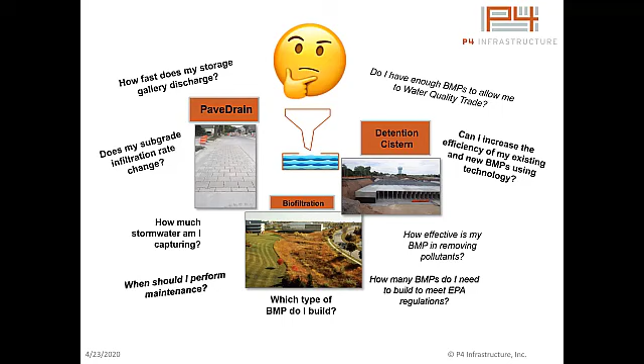So what is the PaveDrain P4 system? Well, as you know, and you're here today and have seen it before, the PaveDrain system is this articulating concrete block surface. And what we've done at P4 is created a block that includes a computer, solar panel, battery pack for running computers, and also a cellular transmission system for a water level sensor that is beneath and in the storage gallery below the surface.

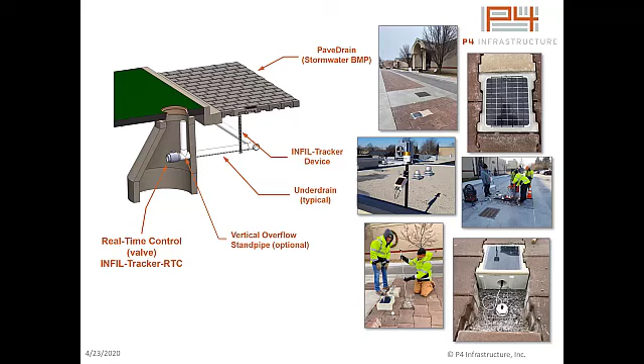Now, what happens below the pavement? Well, we started out, and Doug walked you through a series of experiments. We started out with what we call our PaveDrain Patio in Brown Deer, Wisconsin. And this is a 2-foot deep storage gallery. It's carved into very, very stiff clay. So it's a 10 by 10 patio, and we have 2 of our sensors installed. And there's been many rain events that have occurred on this surface from October 2019 to present.

The surface runoff that goes to this is a little bit from the adjacent parking lot, some of the direct rainfall that falls on the patio surface, and then also some downspout discharge from an adjacent building. We have the rainfall gauge, or Rain MX as we call it, on the building next to the patio. And what you see in the graph is a couple of rain events, and there's many more as I mentioned. These rain events do indeed cause infiltration through the surface into the storage gallery below.

And as I mentioned, this was very, very stiff clay, and the infiltration rate is really quite slow. And you would expect this to be on the lower end of WinSLAMM models for infiltration rates, on the order of 0.01 to 0.015 inches per hour. But what you can see here is that rain events do indeed cause stormwater flow through the surface into the gallery, and the gallery is indeed discharging, albeit at slow rates, and that's expected given the material that it's founded upon.

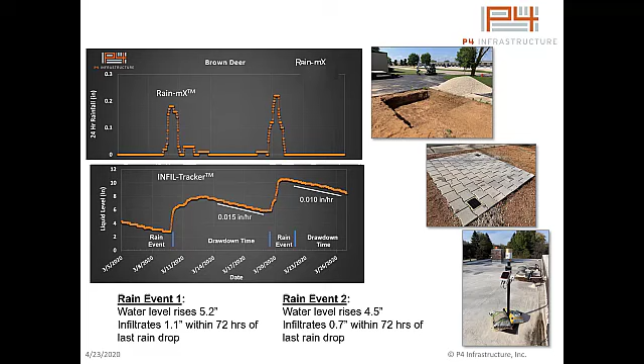Here's another one. We do have an implementation of 3 of our sensor systems in Cudahy, Wisconsin that have been active since January of 2020. And the rainfall gauge that you see there is on top of, pardon me for going backwards for a second.

So I'm sorry about that. Had to admit someone to the meeting.

We now have the Van Norman Alley in Cudahy. And the rainfall gauge, as I mentioned, is on top of City Hall. And there are 3 sensor systems located throughout the city, one of them in an alley application. And what you see here is a series of rain events between January 20th, 2020 and March 20th of 2020.

And what you see is the infiltration of the water is happening through the surface, as well as being drawn down by underdrain. So this is a typical application of underdrain below or within the storage gallery. That initial very steep slope is water that is going through the gallery into the underdrain. And then there's a slightly more shallow slope where the stormwater runoff is actually infiltrating into the ground.

And what's interesting about this application is it's another one of those that tends to have irregular maintenance associated with it. And in the lower right corner is what the joints look like. And so Doug has shown some instances where this is a plugged surface by many implementations and applications and visual evidence. However, what you can see is there is water going through the surface, going through the gallery, and discharging from the gallery on a regular basis with each rainfall event.

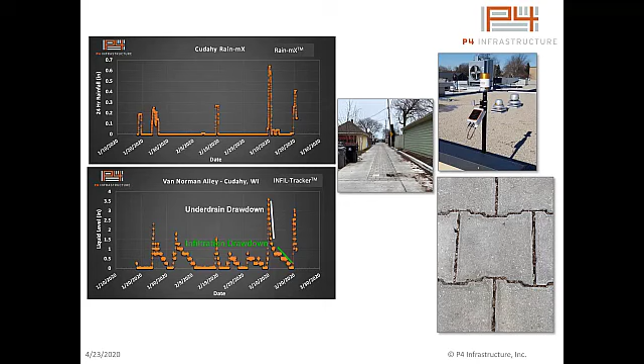Now, how does P4 look at this system, which is a permeable pavement system? Well, we look at the permeable surface as basically a funnel capturing water. We look at the storage gallery below as a tank that stores water. Now, according to many guidance principles and standard guidance documents, the underdrain presence within these results in a pollutant efficiency of 65% for suspended solids and 35% for phosphorus or total phosphorus.

So when that underdrain removes the water from the gallery, it is not as efficient as it could be. If you're infiltrating into the ground with all the water in the gallery, you can have 100% pollutant removal, both suspended solids and phosphorus. So what the P4 systems do on the right is, number one, it tells you how much rainfall lands in that funnel. It tells you how much water is stored below the funnel. And it also tells you how much water is leaving and the rate at which it leaves that storage tank.

So the concept behind the RTC, or the real-time control system, is that we actually control the water leaving the storage gallery. When it is draining through infiltration, we get 100% removal in suspended solids and phosphorus. And when we have to open the valve and drain through the underdrain, we're doing it at 65% effectiveness for suspended solids and 35% for phosphorus. So we maximize and optimize the pollutant treatment capability of the storage gallery and the system.

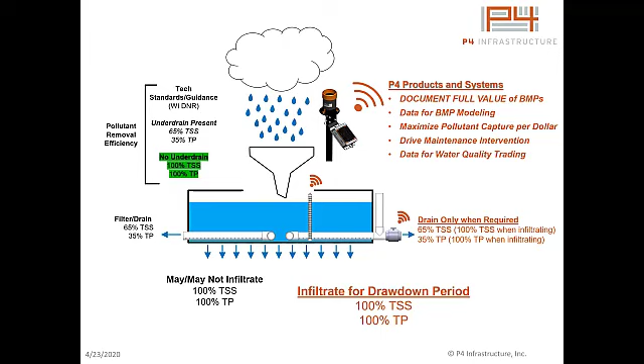Now you can imagine that these things are placed throughout an urban watershed. And I just took an instance of what we have here in Whitefish Bay, Wisconsin, near Lake Michigan, where there is one TMDL challenged body of water, the Milwaukee River, and then there is another outfall and discharge location in Lake Michigan. So you can imagine these funnels and storage tanks throughout Whitefish Bay.

Now, how do you perform maintenance when and where needed throughout these BMPs? And number one, are all of these owned by the municipality? Some of them are privately owned, some of them are not. Some of these might be constructed as part of MS4 compliance needs. Some of them might also be constructed as part of TMDL compliance. So what we're doing with the P4 system is we're tying all of the PaveDrain BMPs together in a unified approach to stormwater management that includes maintenance.

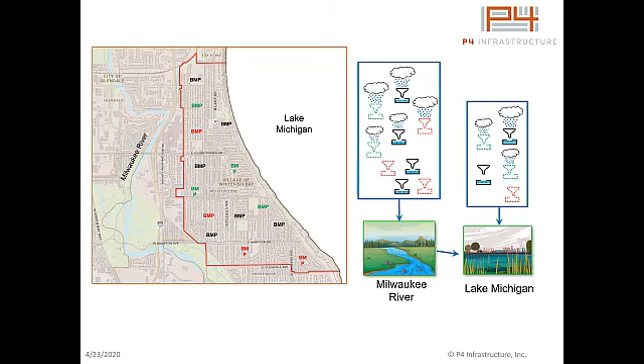Now, what you see here is how you look at this within the P4 dashboard. What P4 has done is we've built a system, really a database, that is viewed through the Esri ArcGIS interface. And this is the city of Cudahy's implementation of their 4 sensors in their network. There's the Van Norman Alley permeable surface, there is the Squire apartment building permeable surface, and then there is the installation at Cudahy City Hall, and then the Rain MX device on the roof.

So if you wanted to know what's happening at any one of these devices, it's a simple hover over the pinpoint, click on it, and you can see that there is a rain gauge chart that is showing up on the right. There's analytics that are being tied to this, as well as the ability to download historical data, print reports, and generate alerts. So P4 has this dashboard in implementation with Cudahy, as well as the city of Appleton, which is an underground storage cistern.

And we are reviewing these and developing the dashboard with their input so that it's the most effective for the municipality's use. Now, what is this EPA compliance, MS4, TMDL stuff? I'm sure many of you are familiar with this, but the way P4 views this with their systems in mind is that we have to achieve an overall goal of Water Quality Act compliance with whatever we do with stormwater

best management practices. Some of these are privately owned BMPs and they're already built, for example maybe a big box parking lot. Many of these are publicly owned and already constructed. It might be a municipal parking lot. It could be an underground storage cistern. And some things need to be built in order to complete the EPA compliance circle. And this is what we call the water quality compliance gap.

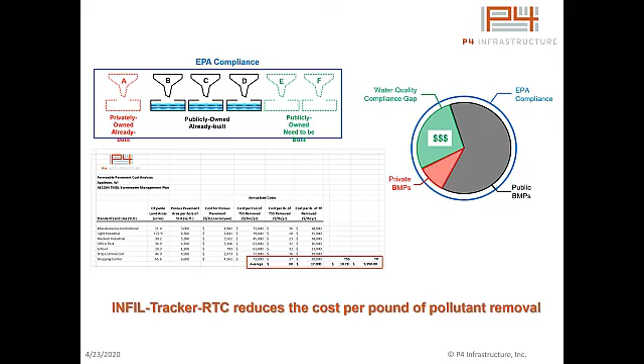Now, retail pricing and return on investment. When we look at this from a point of view of an individual private property owner, for example, a parking lot, many times there are going to be stormwater utility fees returned to that property owner from a municipality that is hopefully receiving benefit with their MS4 compliance in keeping stormwater where it lands.

And in the case here, it's a relationship between Easy Storage and the city of Cudahy, where the stormwater utility fee is essentially $7,900 per year for Easy Storage. Now, what the city of Cudahy does is it actually returns $6,700 back to Easy Storage for disconnecting from that MS4. And at the same time, Cudahy has to inspect the BMP. So they withhold $1,200 a year to do that inspection.

So the InfilTracker device, and you can see it here on the left, is a PaveDrain block with a computer embedded inside, a battery pack inside, and a solar panel integrated into the surface, as well as an InfilTracker sensor next door, and then of course the Rain MX system to give you rainfall measurements. Those two devices together are $6,800.

And an affidavit of maintenance, in our opinion here, is the InfilTracker system. If you want to print a report showing you've infiltrated stormwater, you can print a report and it's very easy to do so. So the return on investment for the devices is essentially a year for that stormwater utility and certainly the private property owner that installs that.

The net income after you recover that capital expenditure is that now hopefully fully returned $7,900 per year, minus, I should say, the $300 per year in order to view the data, print the reports, etc. So P4 is beginning to bring the latest and the newest of technology economically into these systems to not only drive the efficiency of past construction, but also affect the future construction and do it more economically.

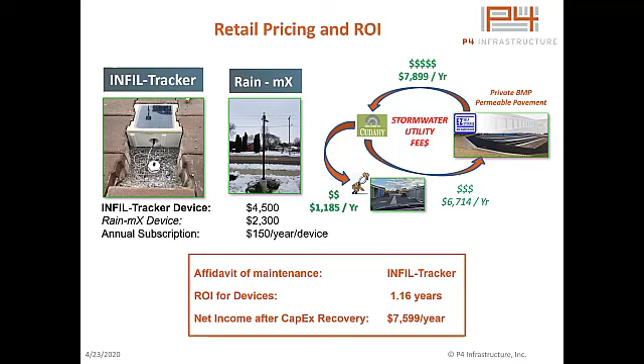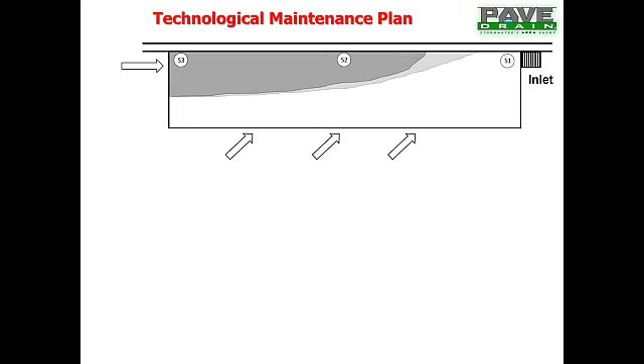Thanks, Chris. Fantastic. One of the things we looked at when we were talking with Chris about getting this started was we'd like to do a lot of analogies. And one of the analogies we started off with in terms of maintenance is if you had a light bulb, would you change that light bulb if it didn't need to be changed? And the answer is always no.

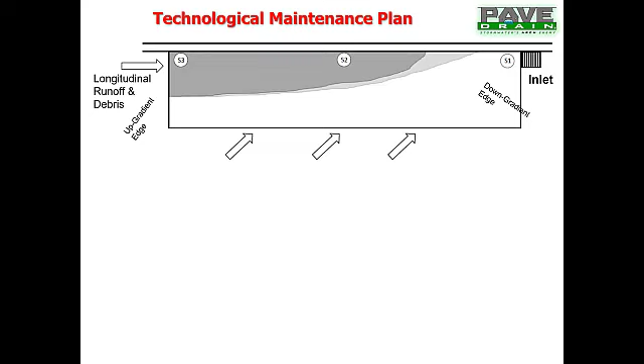Well, why go out and do maintenance just because it says so on a calendar, or somebody wrote a rule and says we need to do this? Let's do it when it needs to be done, but we need something to tell us how to do this. So what we've already seen is the debris and clogging happens from up gradient to down gradient.